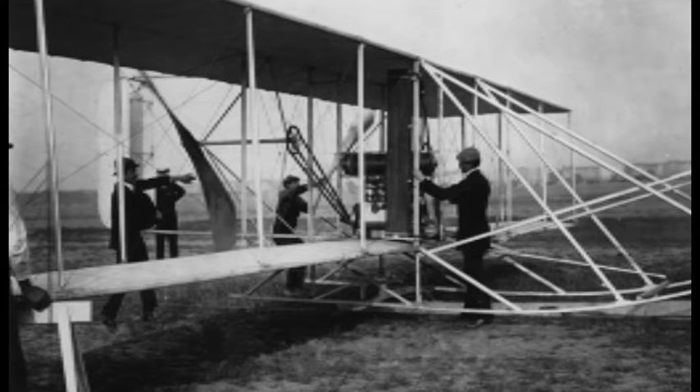Over 100 years have passed since the first flight of an air vehicle heavier than air took place. Within this short time, mankind has learned to build perfect and heavy-duty airplanes and even stepped into outer space.

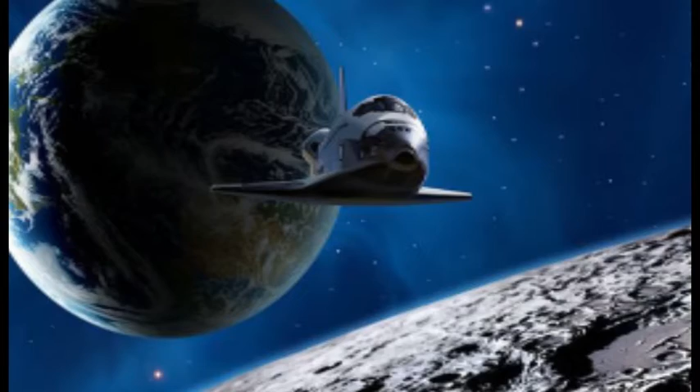Airports are complex units providing not only the airplane's reception, but also adequate distribution of the stream of people, vessels, and equipment, as well as support of continuous operation. The accuracy of functioning of all units provides the fully featured airport functioning, which implies optimal organization, reduction of relevant expenses, and minimal ecological and environmental damage.

Any airport should have both special service entities, flight landing strip, control tower, and a standard vehicle set: control station, transportation, maneuvering, inner and outer cleaning, as well as minor maintenance options.

Considering the reception of mid-range and small vessels, as well as multiple turnoffs, all airplanes land on different but intersecting landing strips. The airports are equipped with a large number of landing strips. The spaces such facilities occupy are enormous, even comparable with the respective metropolises' spaces.

These spaces are extremely expensive in densely populated regions. They sometimes get in the way of the city's development, and they also cause irreparable damage to the environment.

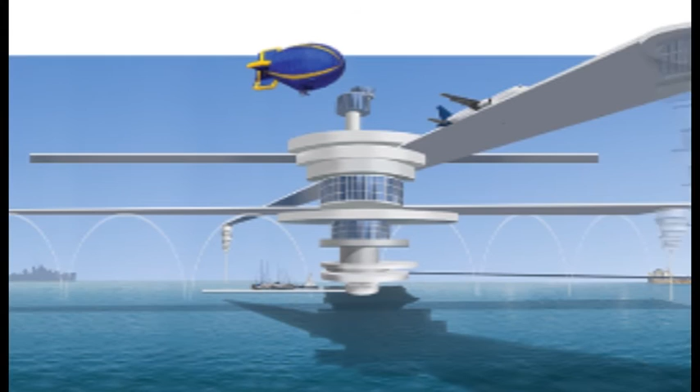The Multiport project is a new concept addressing the above problems. The multi-level structure or vertical alternation of the flight landing strips is a good contribution to area optimization. Considering takeoff and landing technical specifications, the strips are built with due account for the dominating seasonal wind directions, while the multi-level structure prevents airplane collisions during turnoff.

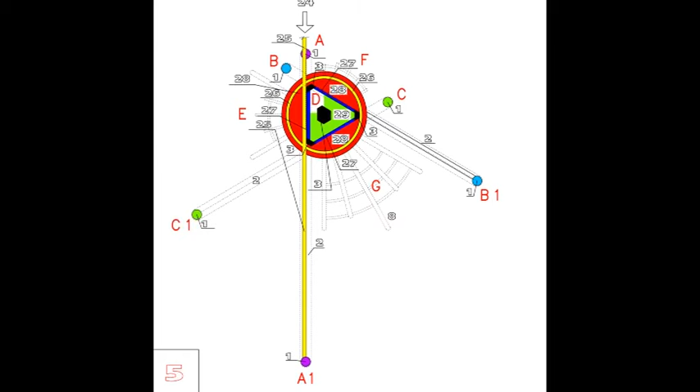Technologically, the structure of such a project is not unfeasible. Just think of multiple precedents of high-level viaducts, road bridges, and junctions. Pile flight landing strips can also be referred to as relevant examples.

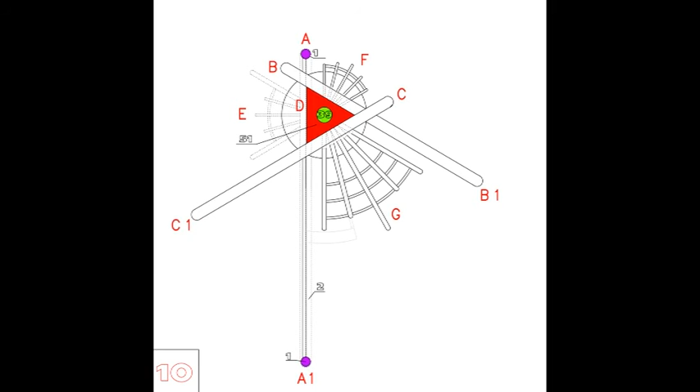Placing flight landing strips high above the land on piles or other structures won't cause any ecological disturbance. The multi-level structure allows creating a new transportation junction point which embraces all means of transport, whether surface, air, or water.

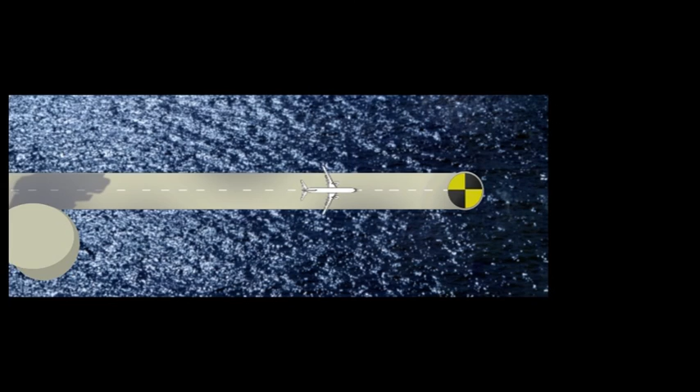Much of the above currently sounds unusual, if not unreal. However, what's really unusual is that no one has ever considered using these ideas in this context. The Multiport concept makes this realistic, and thus we finally have a possibility to step into tomorrow, to a world of fast spatial motion without traffic jams or inconveniences.